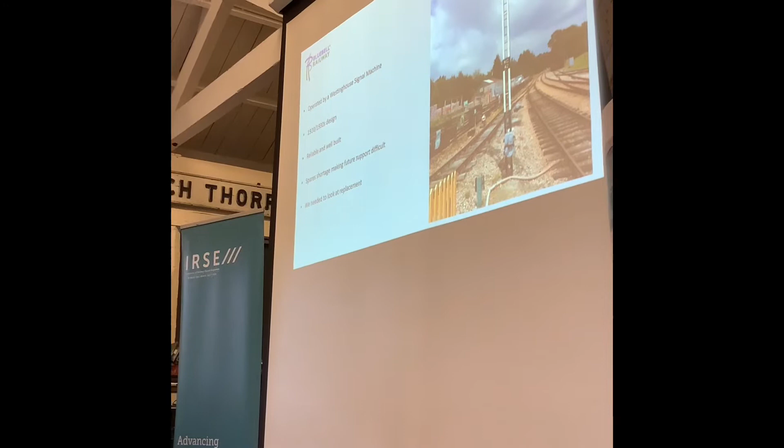So here's a site that's probably very familiar to most of you. It's a platform starter at Kingscote. I'm particularly interested in this little device here. It's called the Westinghouse signal machine. These lovely machines are nearly 100 years old now. They're a testament to the original design and build that we're still using them after all this time.

But unfortunately we need to look into the future. We're worried about support, we're worried about spares, so we decided to look into replacement for the machines.

Oops. The clicker stopped clicking. Left and right. Stop. Can you move me on, please? Oh, there we go.

Right, I'm working it. Okay, so any new project, we've got to set down some design criteria. So we wanted something that was reliable, very important, we wanted something fail-safe. If we lost local power, the signal must return to on. For the Bluebell in particular, we have a long section in our middle station, Horsted Keynes, where various signals can be off for days and days and days.

So we wanted the signal arm to be able to be held off without any re-pumping for well over 5 days. We also wanted it to be based on anything that was free, as much as possible. We wanted it to be easy to maintain. With us being a heritage railway, we wanted something that's not too obtrusive.

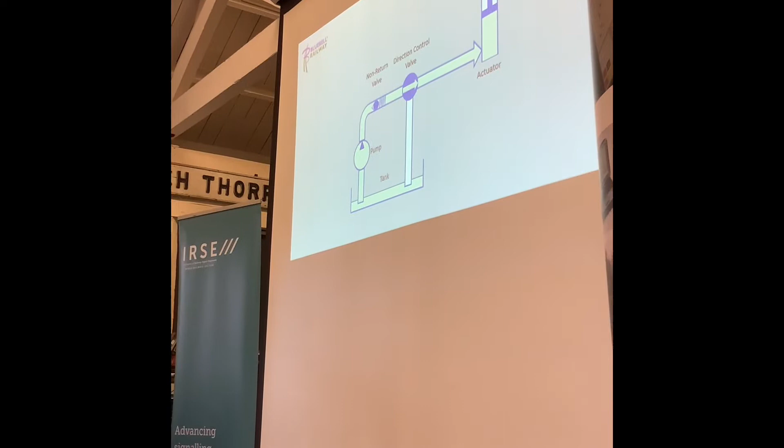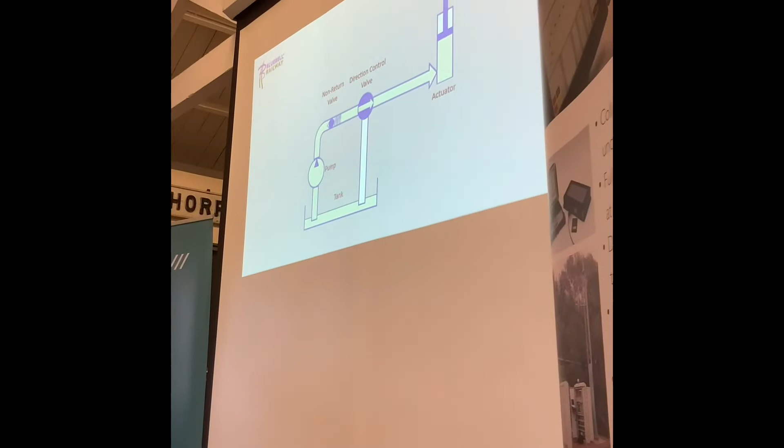So moving on, let's look at a simple hydraulic circuit. We suck hydraulic oil out of a tank, through a pump, through a valve. We control the direction it's going in, and we squirt that up to an actuator. So an actuator, people call them rams, cylinders, call them what you want, but the actuator converts hydraulic flow of oil into mechanical motion. So if we want the signal to go up, we power the pump and place a direction control valve so it's pumping fluid to the actuator.

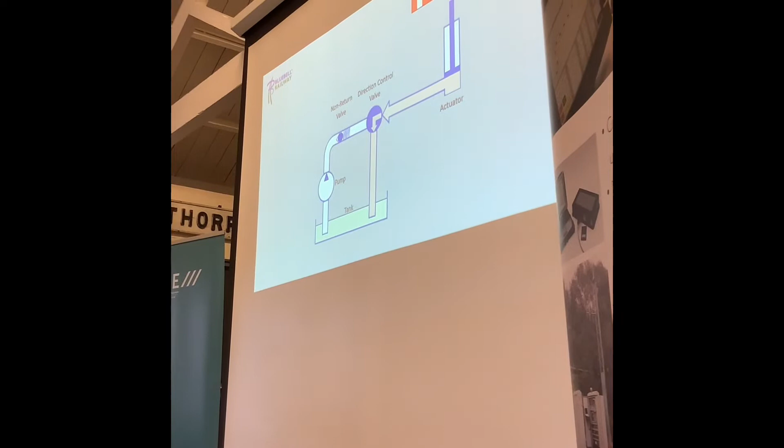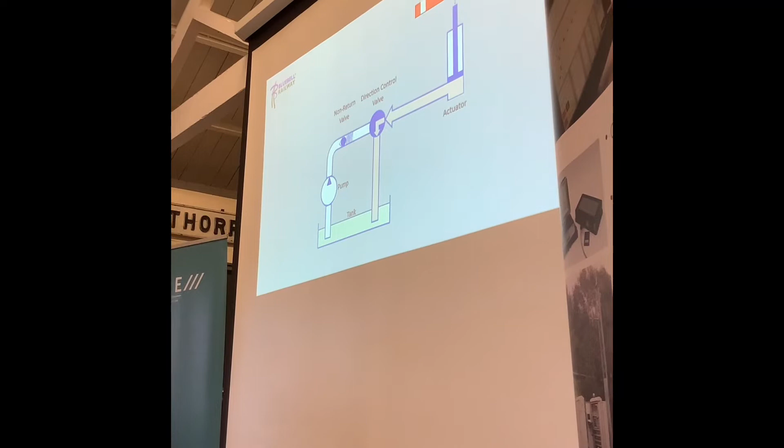If we want the signal to go down, or if there's a power cut, power failure, the direction control valve defaults to this position. So power failure, or the lever going back to normal, the weight of the signal arm will press the fluid back through the direction control valve back into the tank. That's a very simple circuit, and if it's as simple as that, I'd have been banging on here 5 years ago instead of now. Because one of the problems with the direction control valve is it's actually a little bit leaky.

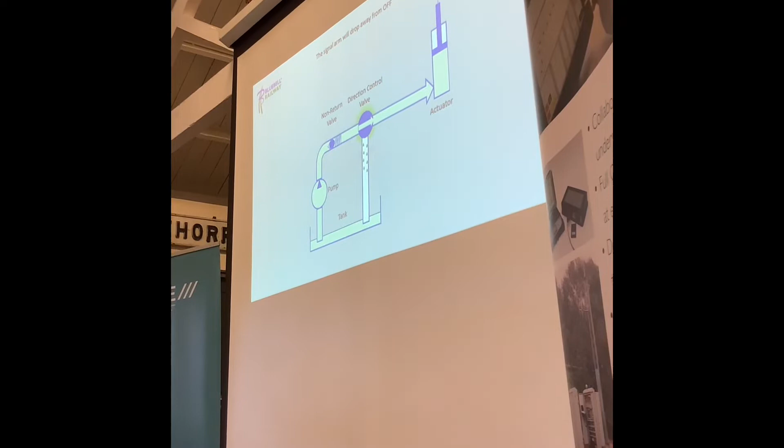So if we pump a signal up using a direction control valve, which in this electrical analogy is more like a changeover contact, and we try and hold it off for an appreciable amount of time, that signal arm will slowly drop back and will leak into the tank. So that is a big problem.

We decided to base our system on clamp locks, as I told you, so bearing in mind the problems we discovered with leaky valves, I'll discuss how the clamp locks work. So clamp lock here, you've got the location full of the relays, you've got the power pack. In the fourfoot, you've got two actuators. So as one's expanding to push the switch rail across, the other's compressing.

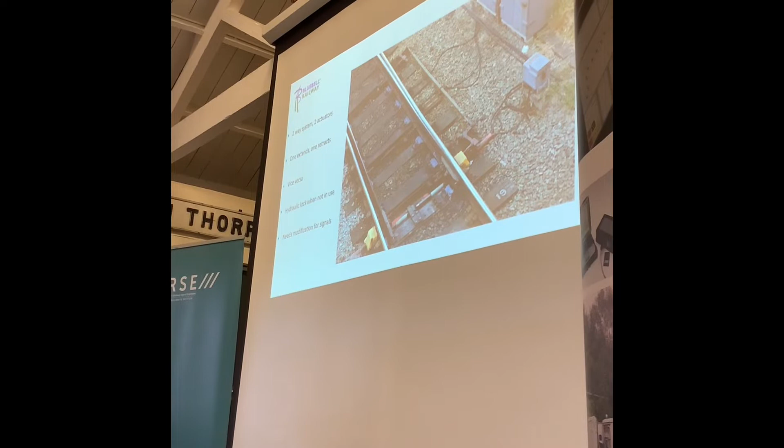And the clamp lock is always a two-way system, so we squirt fluid in one way and fluid goes back in the opposite direction. In between movements, there are little check valves which seal the fluid in. So the switch rail fits snugly against the stock rail, holding it in position. The clamps come round, hence the name clamp lock.

But it's a two-way operation that gives us problems. We can't just simply stick a hose on it up to a signal because we pump it up and we have to pump it back down. And of course we want the fail-safe system. So we can't really use the clamp lock as it is without some sort of modification.

So moving on. There's two ways we can modify this. One is actually very, very simple. We just remove a ball bearing from the check valve within the pump and you can pump the signal into the off position. That's the one that leaks because everything's being held now on the direction control valve, which is a leaky valve. In the clamp lock scenario, it doesn't matter because you've got the check valves holding the pressure in. So that's one option.

Option two is to install a little valve called a Poppet valve, which is very, very leak proof, and ultimately that's what we use. But because the first modification is relatively simple, our running prototype, which we installed at a siding in Kingscote, we based on the original idea of just taking the ball bearing out.

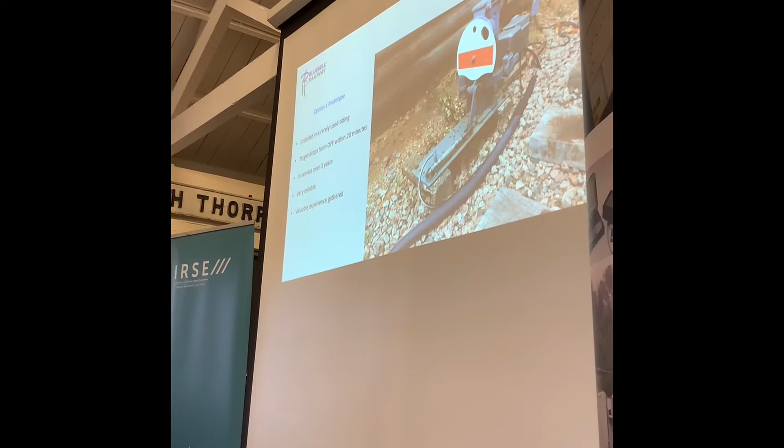So here it is at Kingscote, right? The clamp lock power pack's there, the actuator is there. What you see around there is a standard circuit closer, a standard repeater box. And we actually use that to control the pump.

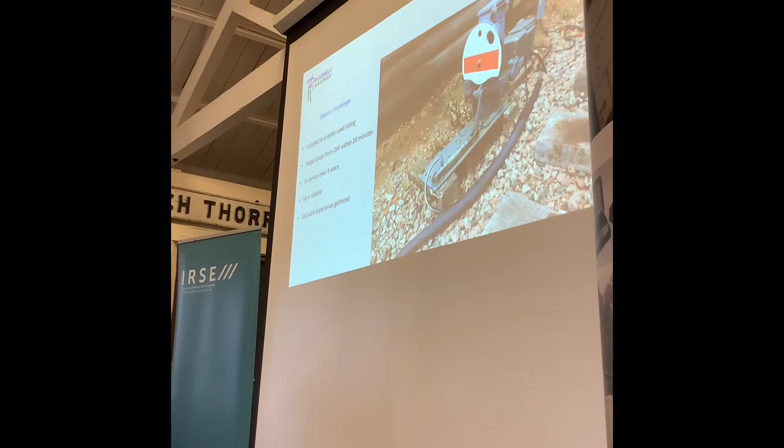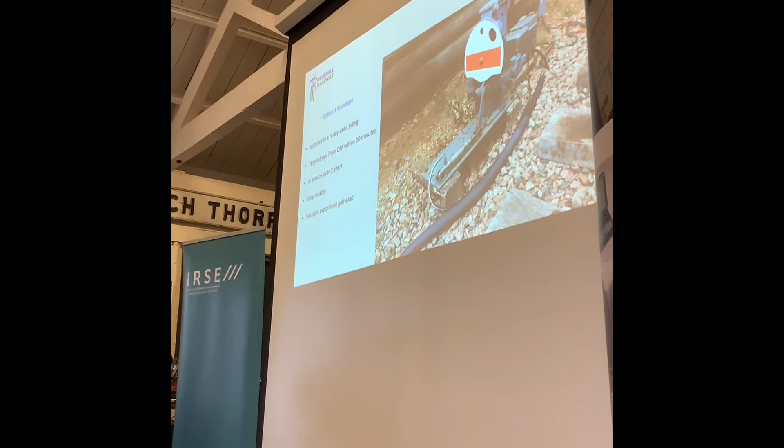So when we want the signal to go off, pull the lever back, we activate the direction control valve, we activate the pump, pumps the signal off. Then when we get off detection, we use the off detection from the standard repeater to stop the pump. So we don't have to festoon it with any extra contacts, this, that and the other.

This gives us a problem that with this system, with a shunt signal, it will slowly leak off after about 20 minutes. Once it leaks off past that off detection, of course, it pumps back up again. So if we put that on a home signal, the signal would be going, and then back up. The outer home before that would be dancing up and down. The distant before that would be dancing up and down. So we wouldn't get a lot of street cred from the train crews.

So ultimately, it's great for a shunt. It's great if you only want something to go off for a few minutes. It works a treat. It's also given our designer a lot of experience in the electrical design. So it hasn't been a waste of time. This has been in service 3 or 4 years now, perhaps, and it actually does work a treat. But ultimately, it's not the way to go for us. So let's move on.

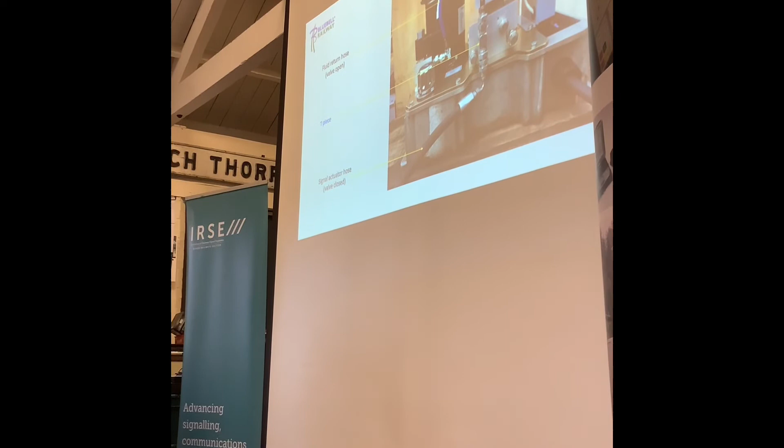If the signalman puts the lever back, or we have a power cut, we lose the power on that solenoid, the valve opens, and the pressure of the fluid being pressed down by our signal arm pushes the fluid back to the tank. So we've now got our fail-safe tick in the box.

We've now got the electrical circuits coming there. That's just a little spacer which happens to fit perfectly on top of that block, and we can fit the standard mounting plate there. This little device here, there's a little hasp with a hole in it, so when we put the lid on, we can put the padlock through.